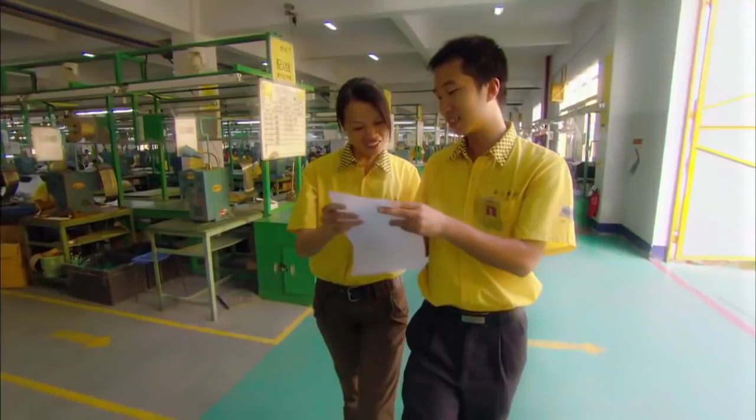But imagine living and working at one of the biggest factories in the world, a workplace the size of Monaco. For these 17,000 employees, it's reality. They come from all over China, seeking a brighter future at this factory called Yupa. Workers craft coffee makers, irons, and electric grills in staggering quantities every single day.

But Yupa is more than a steady paycheck. It's home. People get married here. They send their kids to school here. But the work never stops.

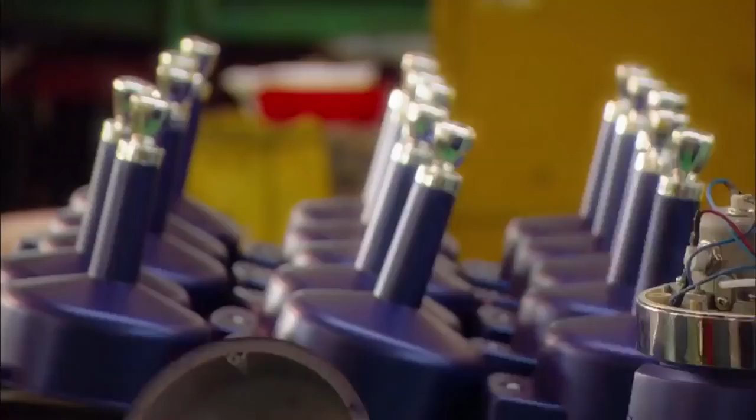Yupa's managers are on a mission to produce new products for every corner of the globe that could forever change the way we think of made in China. Step behind the closed doors of modern China into a factory the size of a city.

Welcome to the place that calls itself Factory of the World. By the time you finish watching this program, Yupa's 17,000 Chinese workers will produce nearly 20,000 electrical appliances.

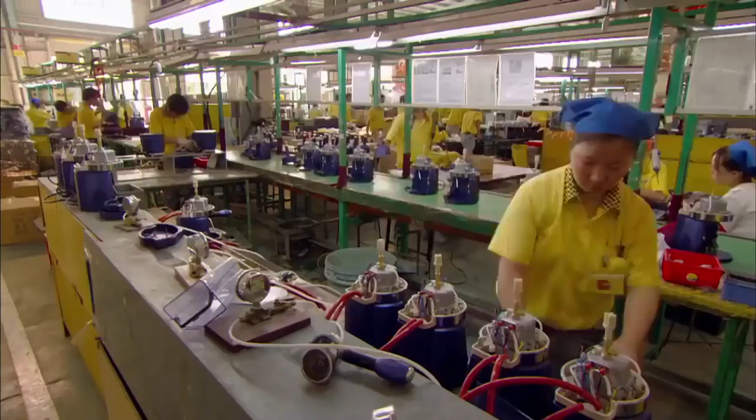Every day they churn out 60,000 irons. Every month, Yupa makes 36,000 coffee makers. That's 2 new machines for every Starbucks on the planet.

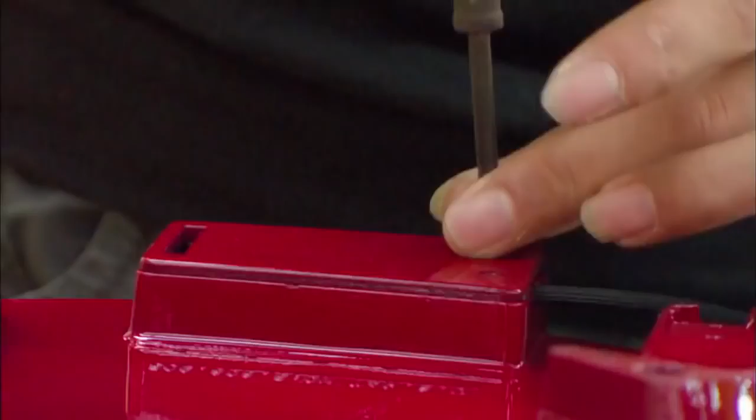And every year, these laborers produce a staggering 18 million electric grills. Stacked side by side, they'd span the Atlantic from New York to London. Chances are you own something built right here.

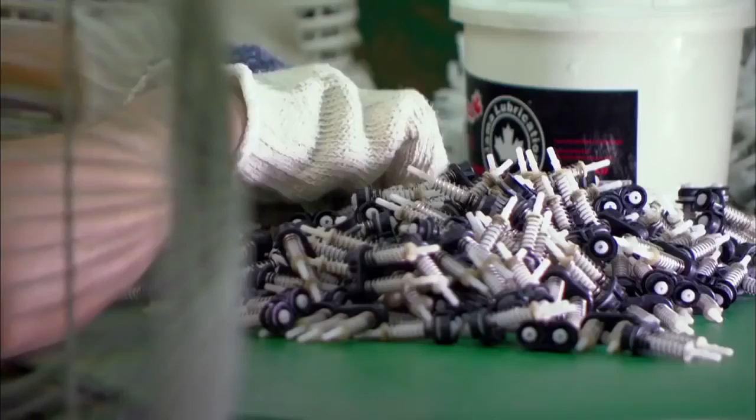Factories like these don't exist in North America or Europe, but they're not uncommon in China, where labor is cheap. Yupa runs on human sweat alone, no need for robots. To ensure non-stop production, workers need a steady stream of parts. Someone has to make sure those parts get to the right place in time.

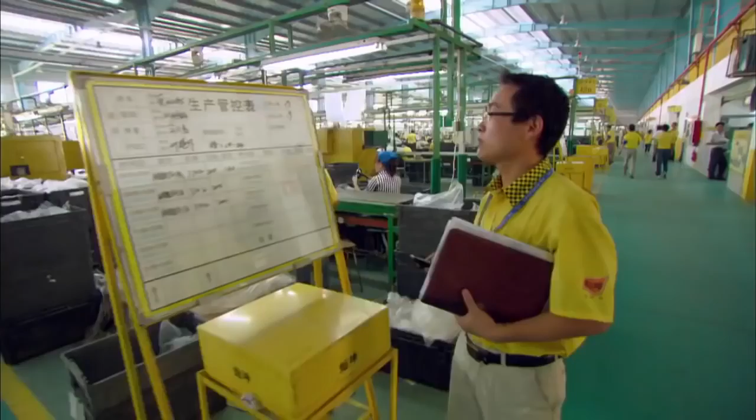I'm in charge of production control. Production control is the brain of the factory. Its main function is to coordinate each department.

If any of Yupa's factories run out of parts, Mr. He's job is on the line.

The production line cannot wait. We have to guarantee that our production is smooth. Running out of materials would affect our efficiency, affect our productivity, and affect our revenue. So I have to fix this in the shortest time possible.

Today, a problem at the iron factory needs smoothing out.

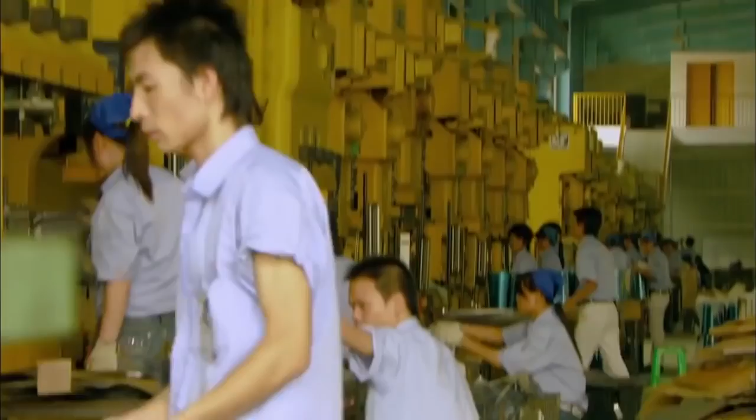Traditional plants use outside suppliers for their components, not Yupa. To slash costs and stay competitive, Yupa builds its own parts on site. So Mr. He's supplier is only a bike ride away.

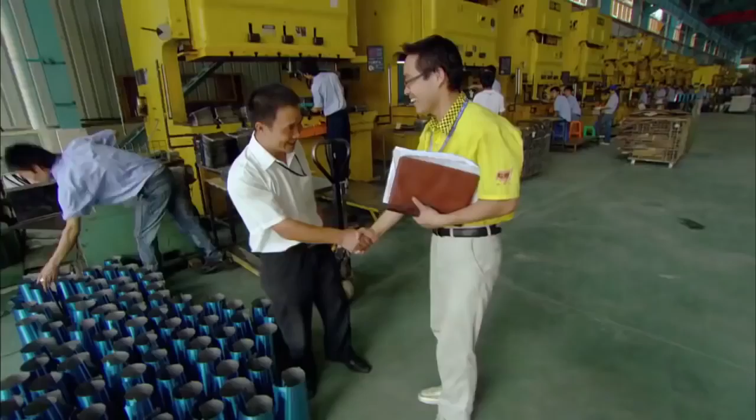When he gets another urgent call.

Now the grill factory is low on a crucial component.

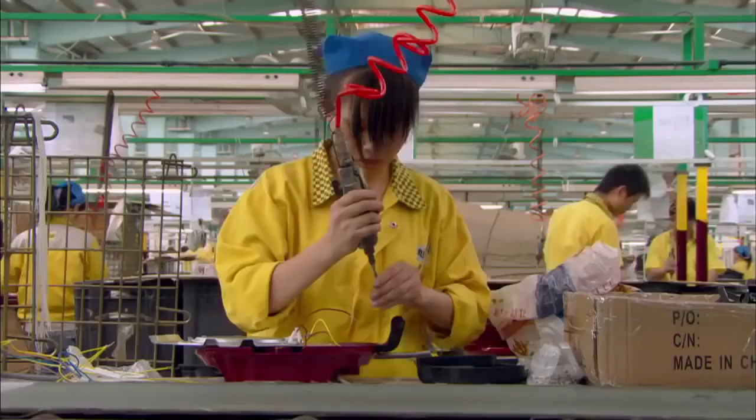Grills are the company's most profitable products. Yupa started producing one line of grills in 1994. Now, 60 assembly lines churn out 800 different models.

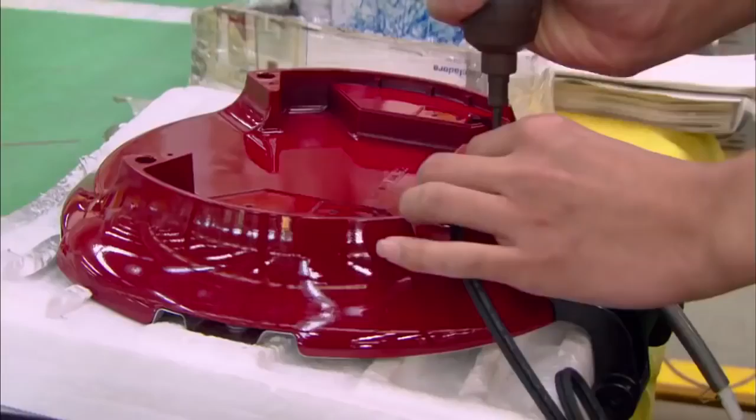Workers make one grill every 12 seconds. That's 50,000 grills per day, or 1.5 million per month, enough grills for every person in Dallas. Grills bring in $350 million a year, but Yupa wants more.

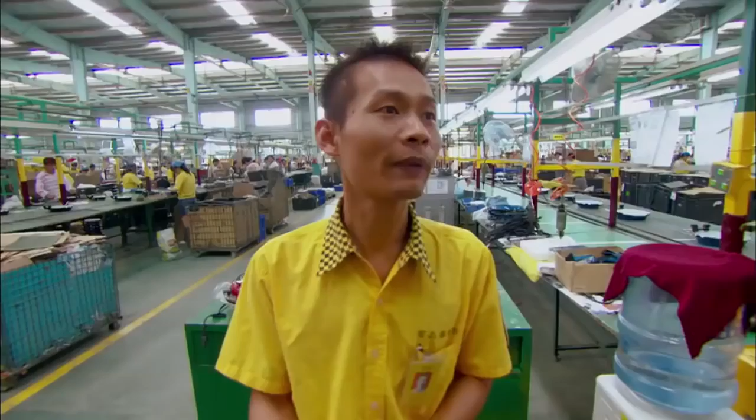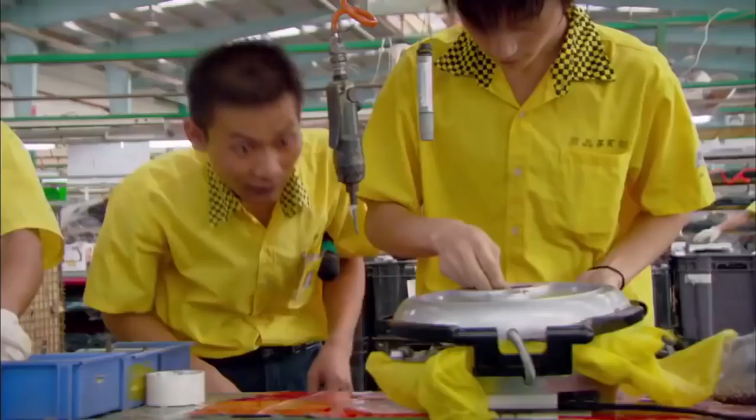By next year, managers expect workers to crank out $500 million worth of grills. Yupa's profits have to rise to outmuscle the competition.

Mr. Ye supervises 850 workers on 30 lines. We have to coordinate all these workers and pull all their thoughts into one. It takes teamwork to accomplish our goals, to get the results we want.

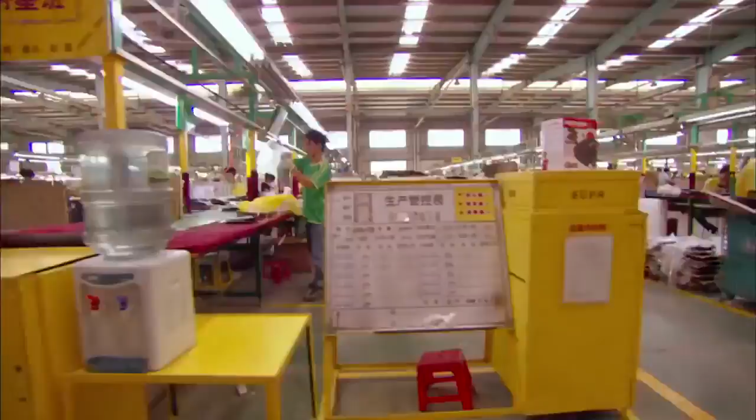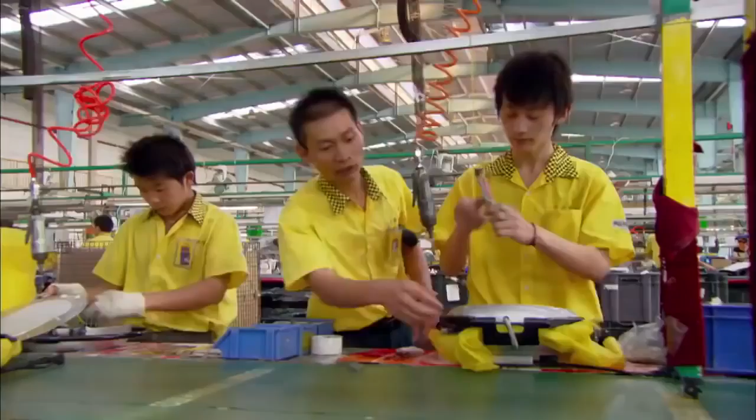Mr. Ye is obsessed with quality control. His aim? Boost output without compromising quality.

In a factory this big, with a production run so massive, even the hyper-efficient Mr. Ye hits a roadblock.

This holder piece holds the grill plate. What we're seeing now is the assembly of this piece. The problem is the size. It's the wrong size.

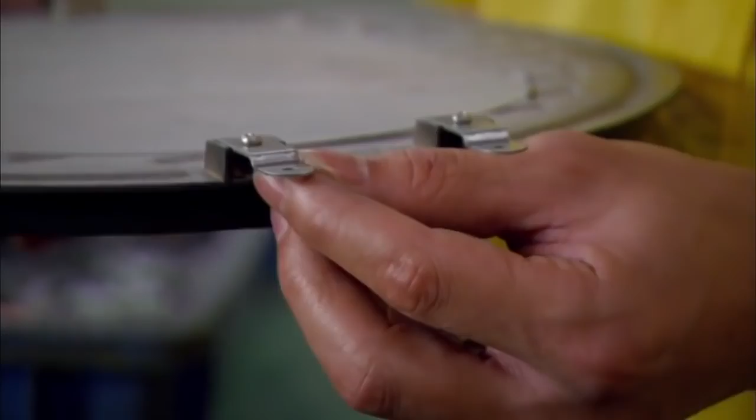They've run out of part number 2627. It attaches the core heating element to the frame. Without this simple component, assembly lines will shut down, unless Mr. Ha finds a fresh supply, and soon.

If we don't get them the parts, 6 production lines will have to stop.

When every part is on hand, grills assemble like a simple puzzle. Wires are linked to the heating element, and the element is fixed to the plate.

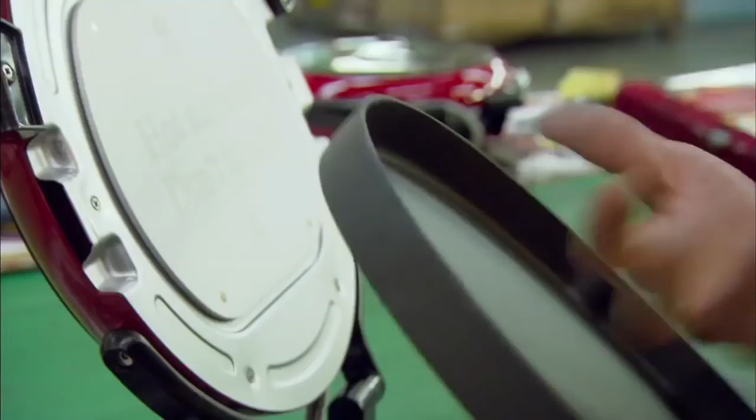When it's not locked down properly, it will fall off. If it falls off, it will burn the hands of our customers and consumers. This job is very important.

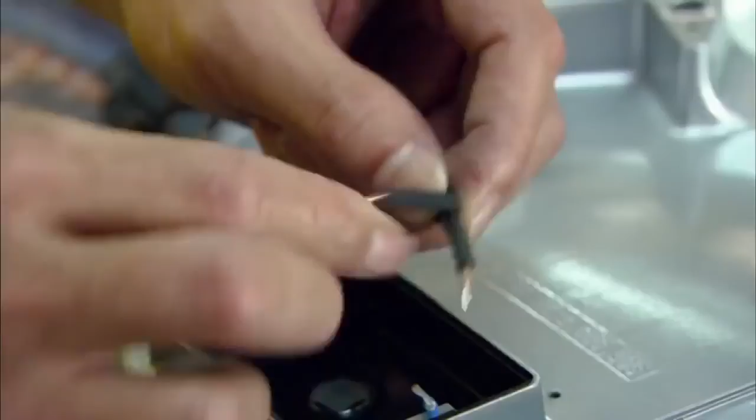Then it's time to connect the power cord. The brown wire is live and the blue wire is neutral. The one with the writing on it matches the brown wire. Connect them and that makes the wire live.

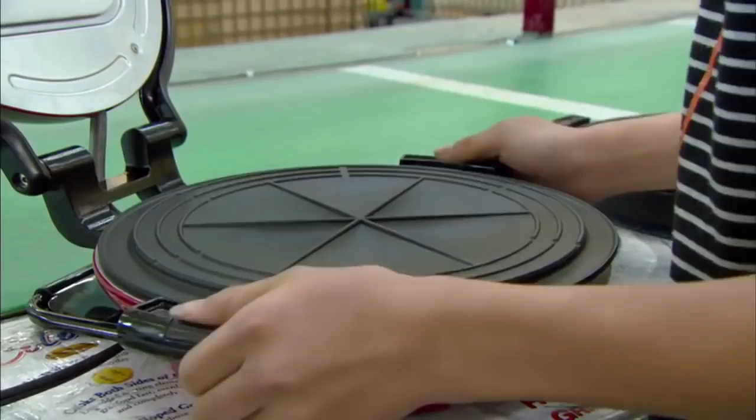Each grill is inspected for flaws in construction or appearance. Finally, every grill is tested to make sure everything is in working order.

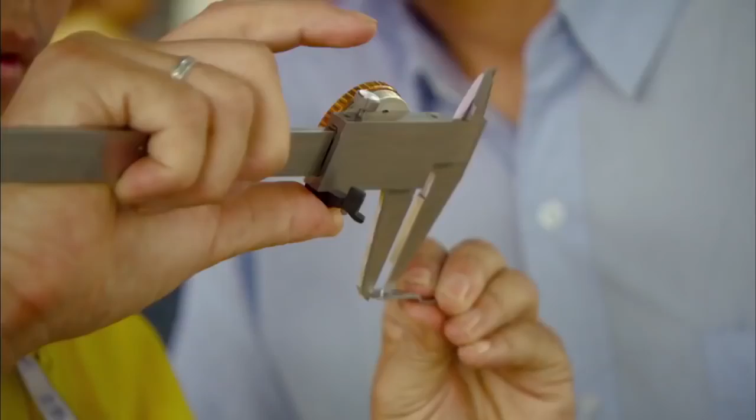On a typical day, Mr. Ye's team must make 700 of Yupa's 50,000 grills. Missing parts cause delays, cost Yupa a fortune, and force workers into overtime to meet their quota. Finding the missing parts falls to Mr. Ha, and the pressure is on.

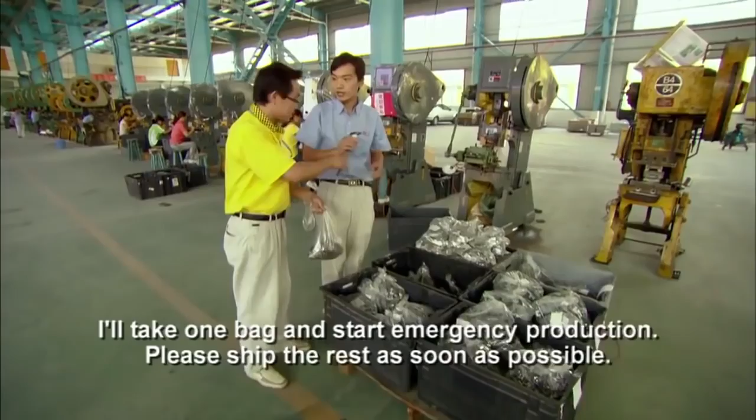Mr. Ha finally arrives, and he has good news.

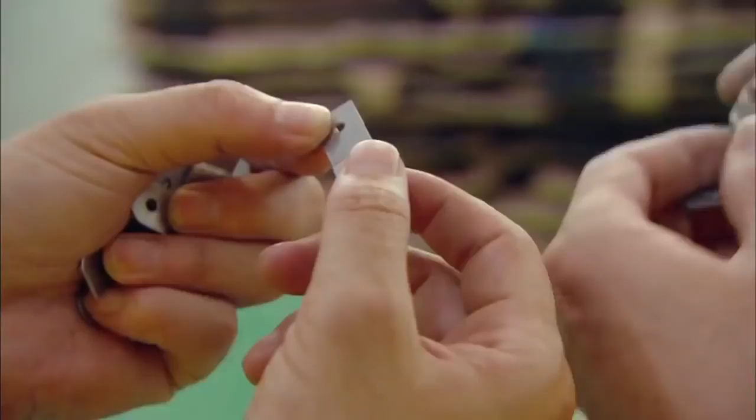Mr. Ha's day has ended on a high note. He heads home to a company-subsidized apartment only minutes away.

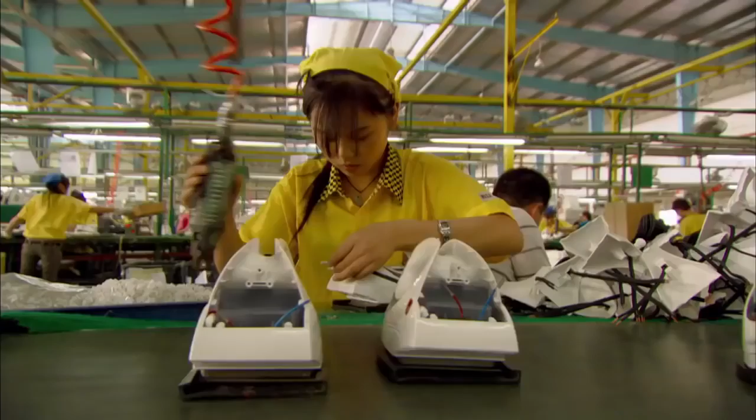It's a place tourists never see. The new face of modern China, competitive, hungry for profits, and ready to take on the world. Located near the city of Xiamen, the Yupa complex sprawls for 1.8 square kilometers, almost the size of Monaco.

We have about over 20 buildings here. The largest building is equal to about 4 football fields. You can have 60 to 70 assembly lines. Each assembly line can have 25 to 35 workers in the line.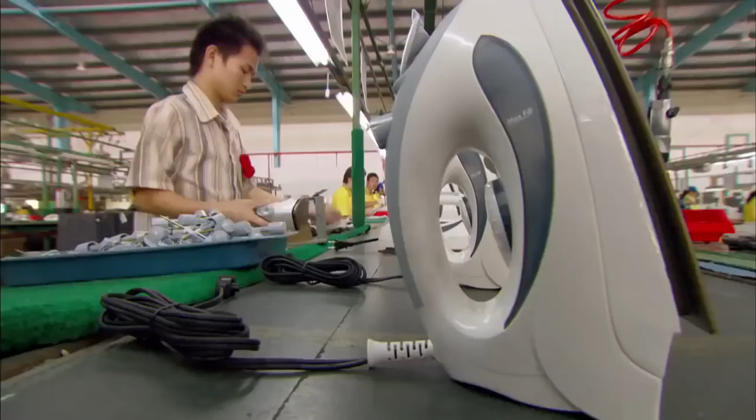25 years ago, there were no factories here, only farms. In the 1980s, the Chinese government decided capitalism wasn't so bad after all. The communist regime established so-called special economic zones, designated places for free markets and foreign investments. Eupa, a Taiwanese company, moved here in 1988. In a few short years, it became the largest manufacturer of irons, electric grills, and espresso makers in the world.

Eupa is a city unto itself, with restaurants and convenience stores, soccer fields and basketball courts, and living quarters for everyone from students to families. Success made it big, and size keeps it successful.

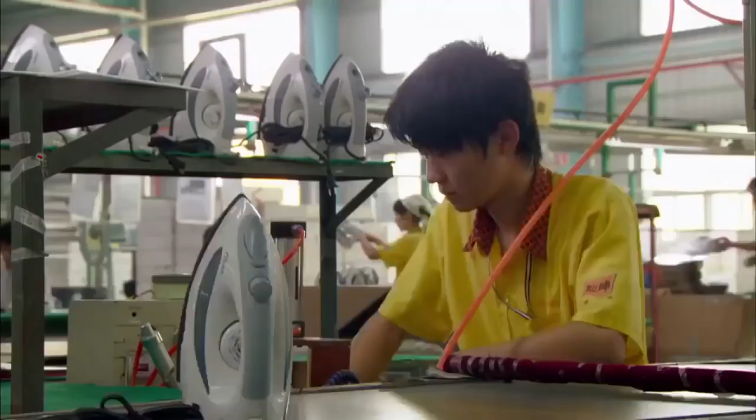Mass production runs push down costs. Almost all parts are made on-site, keeping supply costs low and parts within easy reach. Because we are in this location pretty much isolated, we don't have satellite suppliers surrounding us to build parts for us. So we had to do it in-house, and we had to do it on a large scale.

Eupa's main advantage is a cheap and endless labor force, ready to work for a fraction of a Western wage. 16-year-old Mao Fen Guo left her family and came here in 2008.

But Guo isn't just looking for work. She's here to escape poverty and make her mother proud. In China, many parents prefer sons to daughters.

My mother has only 2 daughters. She's always upset about that. And in order to not let her down, I must work harder and harder.

Guo is a worker in training. With about 1,000 other students, she attends Eupa's on-site trade school. To get here, she had to pass entry exams and pay Eupa tuition. Now she's enrolled in 3 years of study and hands-on training at the factory. If she does well, Guo hopes for a job at Eupa.

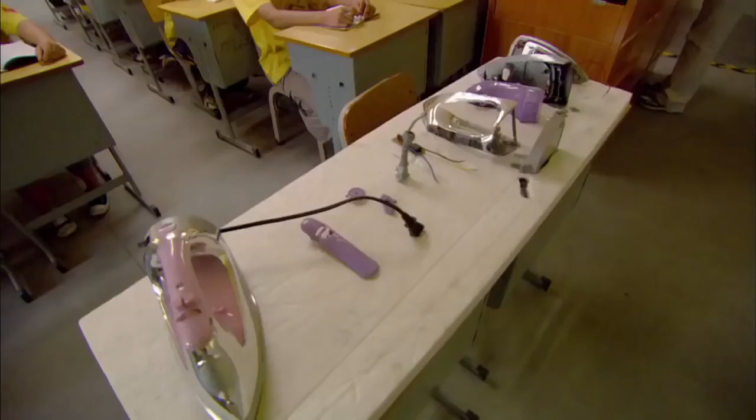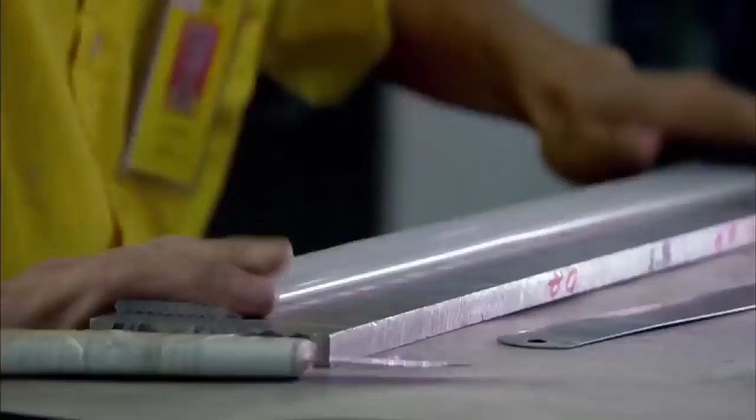Today, she and her classmates are learning everything they ever wanted to know and more about irons. To get a job, Guo must learn the ins and outs of every product line.

We're changing constantly. Last time, we were making grills. Then we changed to coffee makers, and now electric irons. Workers on 27 production lines pump out an iron every 15 seconds, and as many as 60,000 irons a day.

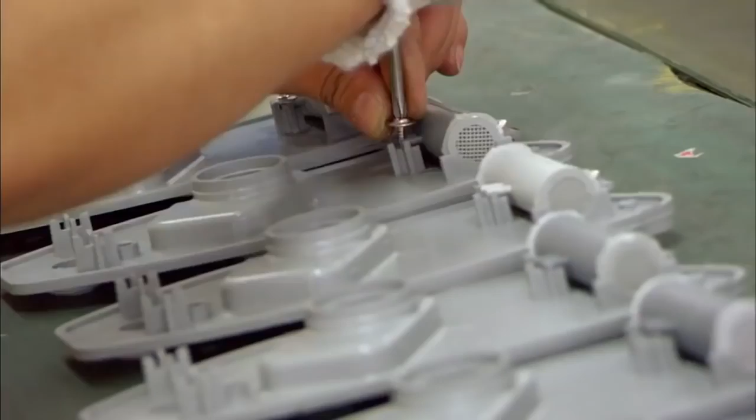Production includes at least 10 separate brands for dozens of companies. With over 30 steps to assembly, iron making is intricate work. And there's no room for error.

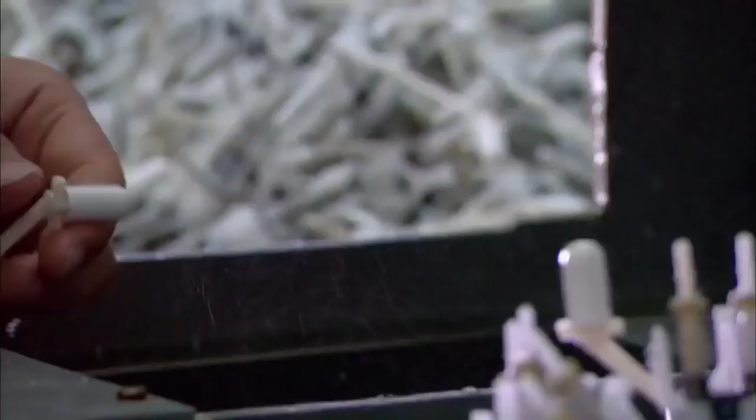Assembly starts with a water spray unit, made up of springs, rubber, and washers. With training and practice, it snaps into the spout in seconds. If it's not closed tight, it will leak or blow. Then it won't work properly.

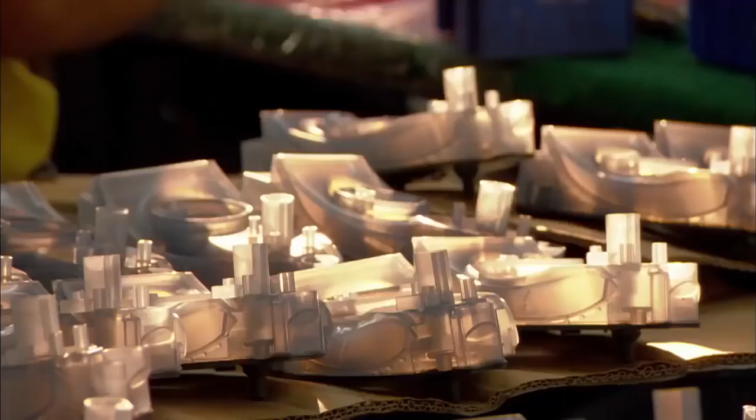Now the sprayer and spout are joined to the handle. The two parts of the water reservoir are placed in a heating machine that melts the space between them and makes the reservoir watertight.

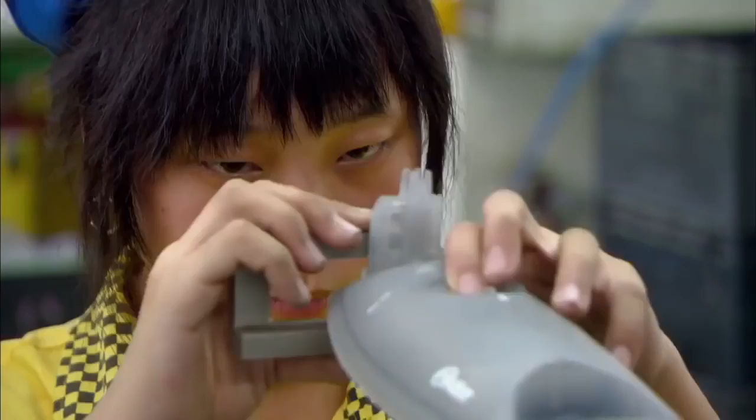Welding is an important part of production. However, it will be easy as long as we follow our operational guidelines. Next, the thermostat is attached to the base.

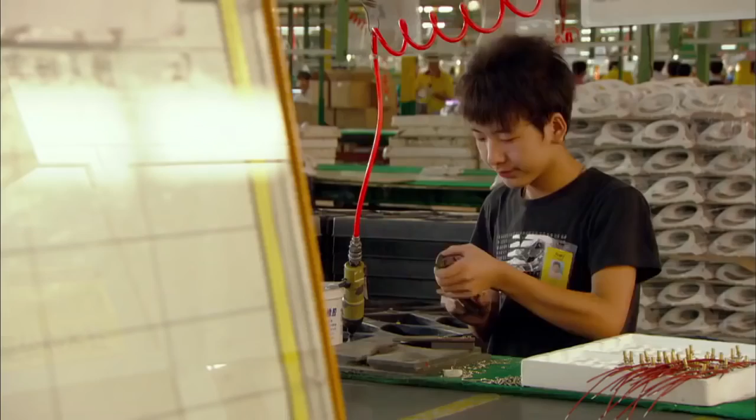You need to make sure you're using the correct format before you insert the base. Using a wrong base can lead to fire. Wiring is also important. Where there is a wiring mistake, there's hidden trouble.

A plastic buffer is placed between the heating element and the handle to keep the handle and the user's hand from getting too hot. After that, the plug is welded to the back of the iron.

We're connecting the wire for the power supply. I can do about 4 to 5 pieces every minute and 300 pieces an hour.

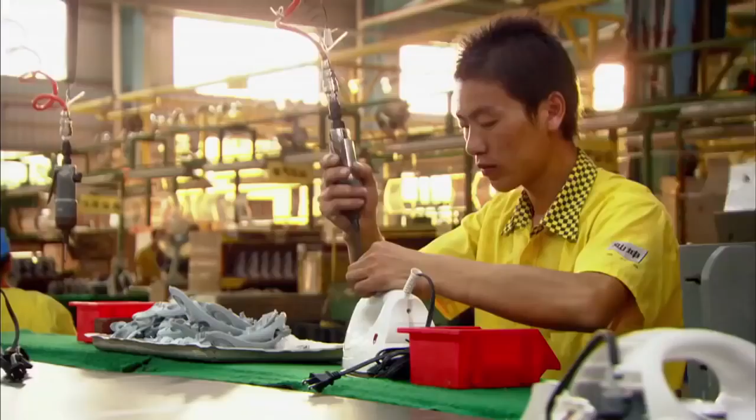Once the spray and steam buttons are attached, it's testing time. First, the steam and squirting functions. Second, the iron's electrical system.

Faulty units are either repaired or removed. Finally, irons that pass inspection are packed up and shipped away. The team won't cut corners or settle for second best.

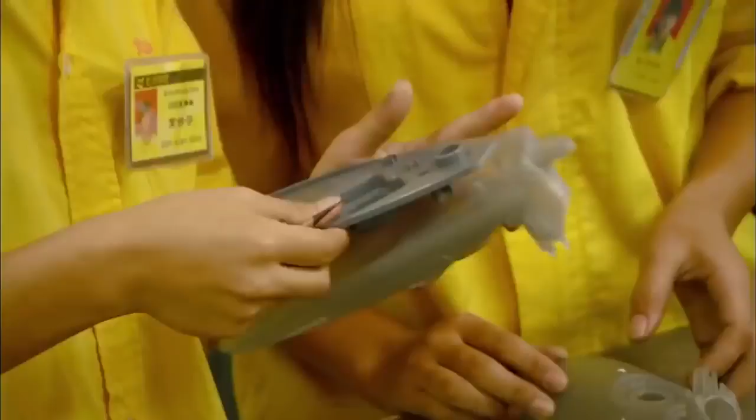Today, Guo and her classmates will put classroom theory into practice and work the iron line. For a teenager from a small town, living and working in a giant factory can be overwhelming.

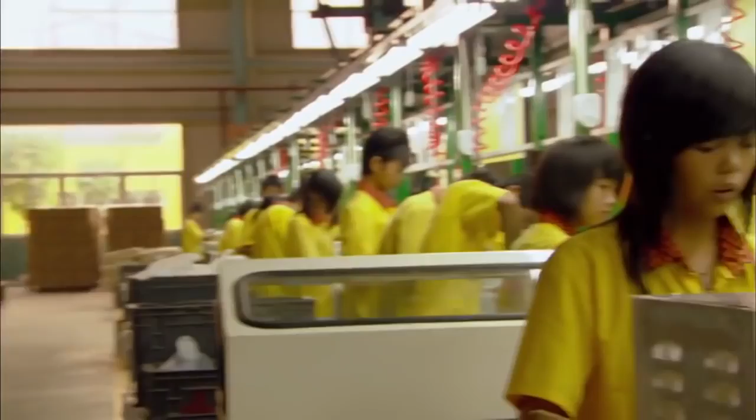My life is not as hard as it was before. I'm getting used to this place now.

Work on the iron line goes better than expected. For Guo, juggling work and school isn't that difficult.

The hard part is leaving family and living far from home.

I guess it's learning how to be independent. When I first arrived here, I didn't know anyone else, and we all have to live together. It was really tough in the beginning.

Like China, Guo is adapting to a new world of high technology and tough international competition. And like China itself, she's determined to succeed.

I don't see myself working on the production line forever, doing the same job. Maybe I'm a bit arrogant or too confident about myself, but I want a better future.

For some people, a better future keeps them married to their job. Workers at Yupa are married to the company.

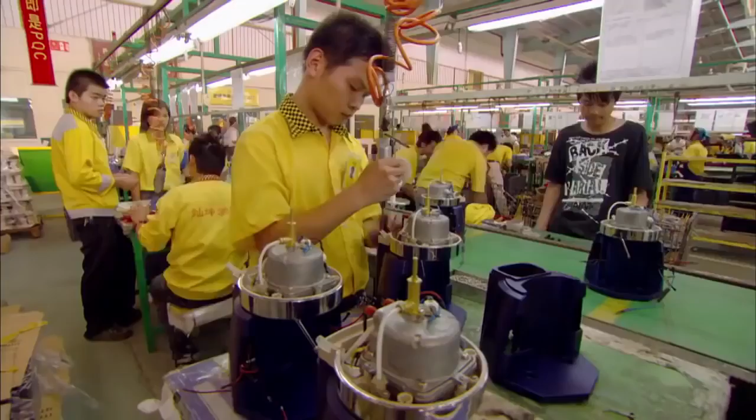In the next 24 hours, it will produce 1,200 conventional coffee makers. Over the next 30 days, these assembly lines will deliver 210,000 cappuccino espresso machines. In the space of 1 year, nearly 2.5 million coffee makers will pour out of Yupa and into the kitchens of the world.

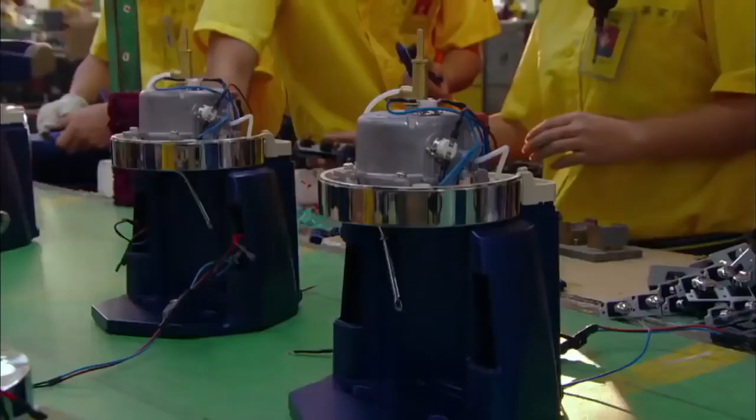At the center of all this is young Lee. We already have 200 or 300 styles, and we develop and add over 40 new styles every year.

Lee's mandate is crucial and broad: tackle any problem that could slow down non-stop production.

We have to make every effort to find these problems and to solve them. We have to make sure that every process is working perfectly. Manufacturing shouldn't be delayed because of these problems.

Today, he's got a brand new kind of problem. One of EUPA's big clients has designed a new coffee maker. It's up to Lee to build a working prototype to entice the client into going ahead with mass production.

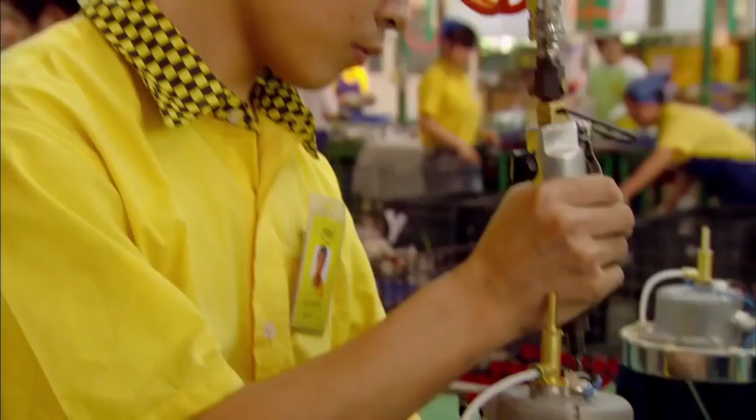Hundreds of EUPA jobs and millions of dollars in potential business are now in Lee's hands. Making prototypes is a large portion of my job and is vitally important to the development of the company.

Lee starts by assembling the heating system for the water and steam. Then he carefully places it into the main body. Just when Lee's ready to assemble it all, there are parts missing.

The supplier is just a walk away, a long walk, but Lee doesn't mind the distance. Someone special is waiting for him at the supply depot.

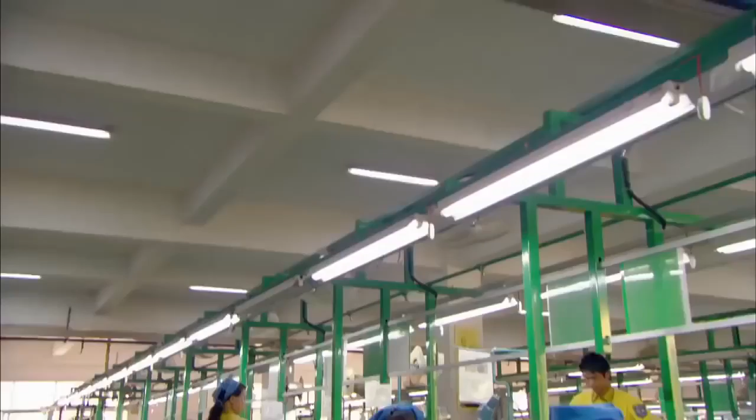The person helping him today is his girlfriend. These perks make EUPA more than a place of work.

With a workforce of 17,000, many of them married with kids, this factory city turns office space into personal space.

Sometimes we work together. For example, if we need the help from the technician to solve production problems, then we meet each other afterwards.

Li Yang Lee works in the parts supply department. She first came to EUPA in 2004.

We fell in love at first sight. I always think it must be God who makes her work here and wait for me. Even now, I still think the same.

EUPA management encourages these intimate connections. They believe couples that work together are more loyal to the company.

By working in the same company, we can go to work together and take care of each other. We can see each other more often. What's more, we can be with each other when we have a problem.

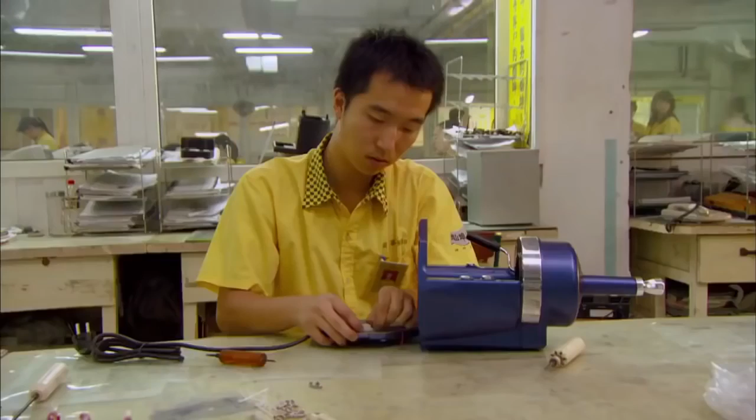With the missing parts in hand, Lee is ready for wiring. Making it all fit into the chamber isn't easy.

I will have to organize all the electrical wires properly to make sure the coffee maker operates safely.

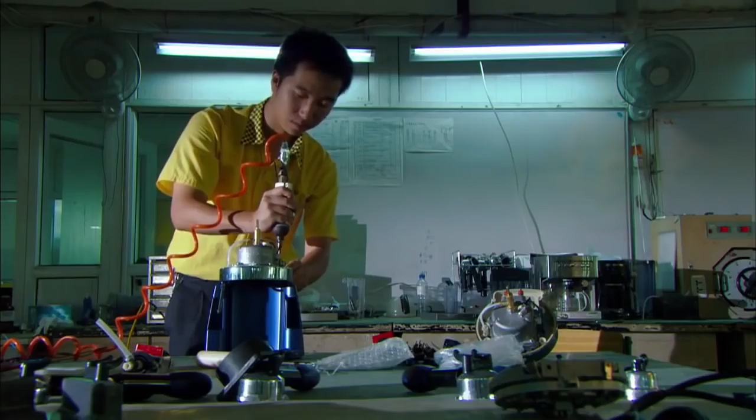But the real test will come after shipping. If the client approves of Lee's model, EUPA could get a massive order. If it doesn't, hundreds of jobs are on the line.

If I make the prototype in a sloppy way, our customers will lose confidence in the quality of our products. It will be a great loss to our company.

Weeks later, Lee's model is approved for mass production, and right away he sets out to create a brand new production line.

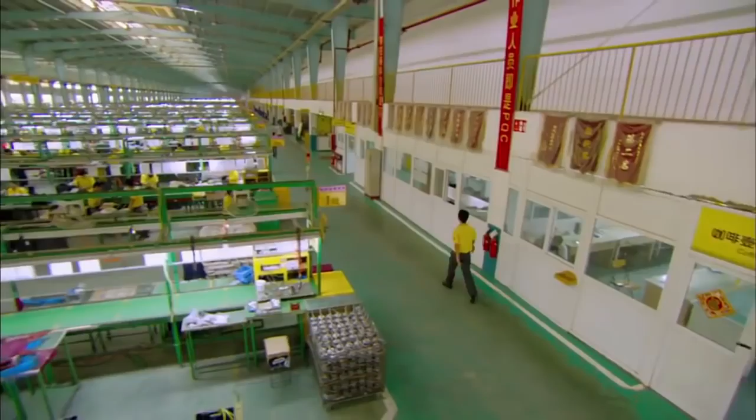It takes a week to prepare the assembly line and train the workers to make the new coffee machine. Making a coffee maker is not an easy job at all - it requires professional knowledge and a profound understanding of coffee culture.

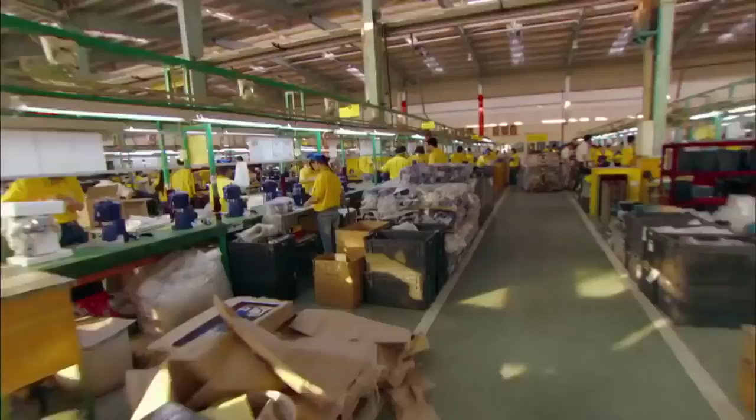When the prep is done, Factory City springs into action and works with astonishing speed. Lee's prototype took half a day to make. Now line workers churn out 700 machines a day.

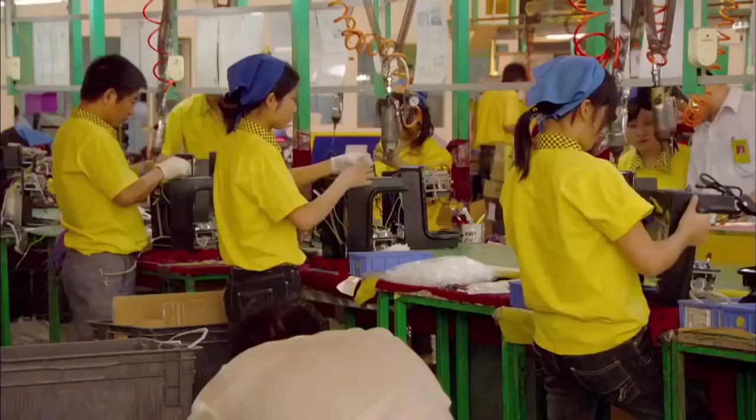Lee's shift is done, and when work ends at Factory City, romance begins. When we're done work, we normally go shopping together or take a walk. It gives us a sense of happiness.

The couple plan to get married at a mass wedding, paid for and organized by the company. All at once, dozens of Yupa workers will tie the knot, while thousands of co-workers look on.

If we take part in the group wedding, with the best wishes of all of our co-workers here, we know we will be getting married in the factory of the world, one dream, and that would be unforgettable.

A mass wedding is the couple's way of showing their love for each other and their passion for Yupa. Chef Xingming Li has a passion of his own, feeding the 17,000 workers that power the factory of the world.

At Factory City, the day has barely begun, but Chef Xingming Li already faces his first daily deadline.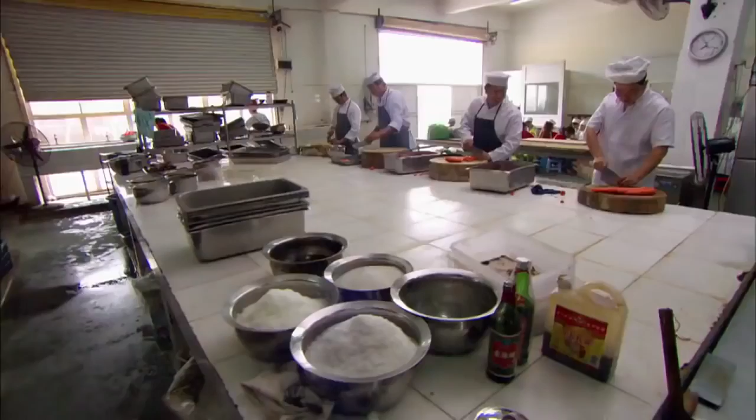Everything is washed, sliced, and diced. Yupa churns out millions of kitchen appliances a year, but there are no food processors in Li's kitchen. Nothing is automated. Everything is done by hand.

By 9 a.m., Li's staff is already racing against the clock. We'll have to finish everything before 11 o'clock because Yupa staff restaurants all open at 11:30. We have to be there in advance.

In 2 hours, 3,000 workers will stop by for lunch. Li expects just as many for dinner. This means his staff of 50 must serve 6,000 meals by sunset.

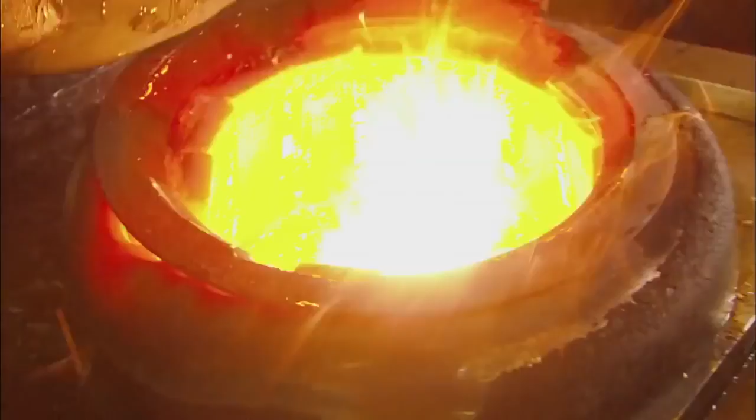We can make different cuisines. Our chefs are all the best of their hometown. They cook up dishes from Fujian, Sichuan, and Henan regions, and they'll soon add halal fare for Muslim clients.

I believe everything that we cook should taste like what your mom cooks for you at home. Li's obsession with food comes from growing up hungry.

My family was very poor. Although my dad was working very hard to earn money, we still didn't have much food to eat. Now food is never in short supply, and all of Li's clients return to work with their bellies full.

Li's passion for food has made him a perfectionist. He hunts the market for produce that's perfectly ripe and reasonably priced.

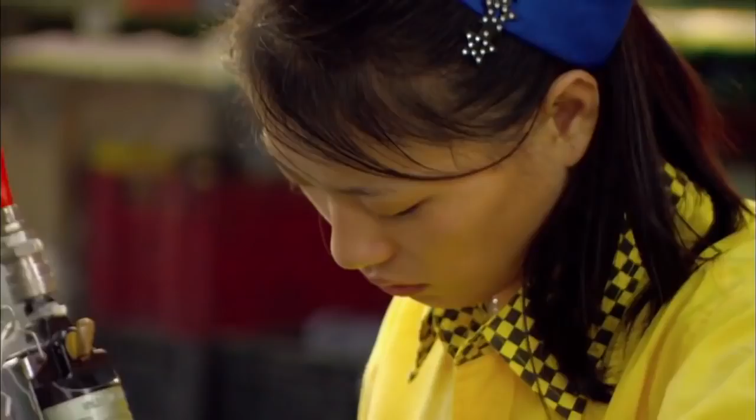Yupa's workers come from every corner of China. Most are in their 20s and 30s. They work on average 40 hours a week and make between $90 and $320 US a month.

While wages are even higher in big cities like Shanghai, many Yupa workers make double what they did back home, if they had any work there at all.

As with any mass organization, thousands of employees create endless demands. It's Mr. Fu's job to address all of them. He does everything he can to keep everyone motivated and committed to staying at the factory of the world.

Fu visits staff living quarters as part of his regular rounds.

We're now going to the workers' dormitory. I routinely go there to check if anything can be improved. If there is, I will talk to the superintendent.

Fu is part landlord and part tenants' rights advocate. Today, he's ensuring Yupa rooms are ready for a group of new workers.

Average rent is only $6 per month, but the type of accommodation depends on a worker's rank and the amount of money they are willing to part with. Fu is paying a visit to Mao Fen Guao, who has a noise complaint.

This is not easy. And while there may be harmony inside Yupa's walls, outside, competition is cutthroat. In a global market, innovation is key. Yupa's employees must endure tough changes to survive.

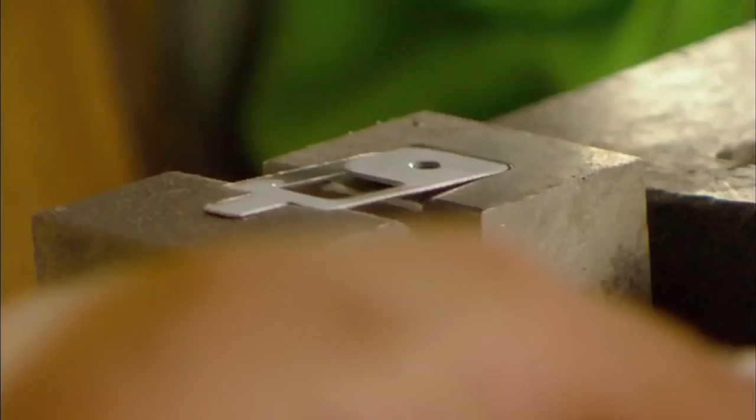In the global marketplace, there's no room for second best. To survive, companies need a competitive edge. Like most China-based companies, Yupa has relied on low labor costs, making products designed by others.

But it wants to move up the production food chain. Yupa's leaders want to design products of their own. They have little choice. To thrive and survive, Yupa must develop a new generation of products.

The factory's very existence depends on it. Thousands of jobs hang in the balance.

No work means not being able to live. This is a fundamental requirement. It's how humans survive. You have to earn money to make a living, and to earn money, you have to work.

Ji-Rong Pan knows how high the stakes are. He is Yupa's Vice President of Product Innovation.

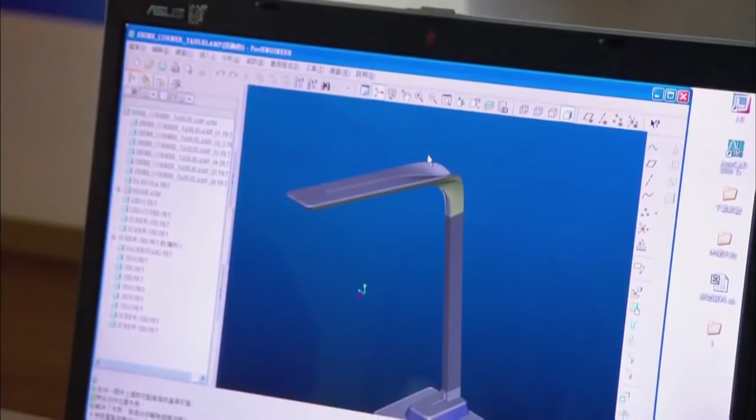I think innovation is the competitive edge of our company, because our company is in the field of home appliances, and the whole home appliance industry is a lifestyle industry.

Mr. Pan sent his staff overseas to study the lifestyle products of the future. They returned with a simple message. The future is green.

We studied the consumers of North America and Europe and their thoughts on this new energy of the future. So we know that their love of the earth is actually very strong.

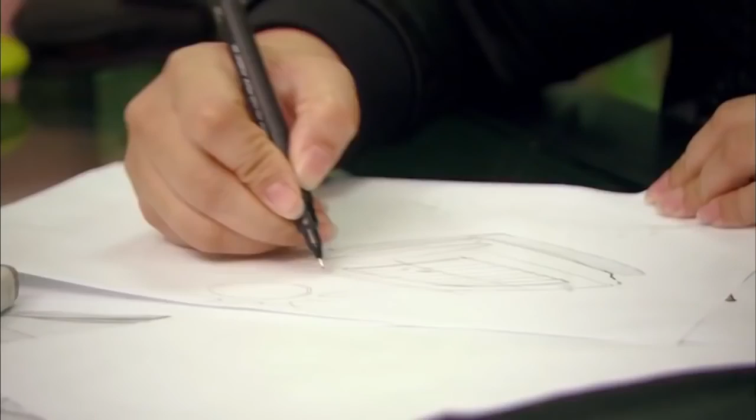Pan and his designers make a bold decision. The first appliance in Yupa's new product line will be powered by the sun. It's a solar lamp.

We want to bring this clean solar energy concept into people's homes.

Going solar may sound easy, but solar panels are expensive, and they're meant to work outside, not in the dim corners of people's homes.

A 3D image of Yupa's appliance of the future starts to emerge. Now the team must turn a digital design into reality.

This factory is a very important part of our development process. It helps turn a product concept into a finished prototype.

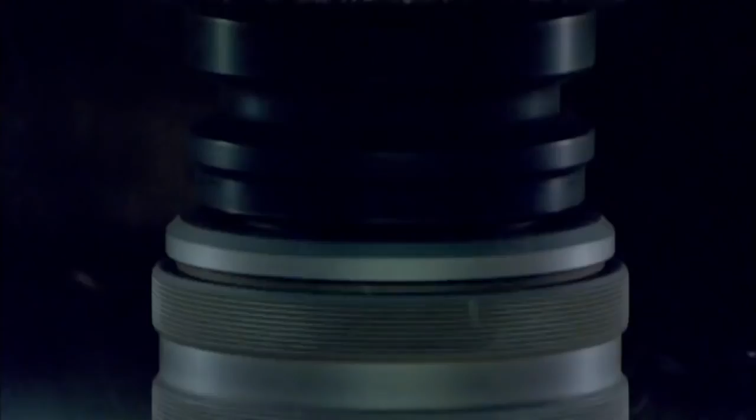Using the design specs, a computerized milling machine cuts a foam cast. And the cast is converted into a hard plastic prototype. If things go according to plan, the model will be used to produce millions of identical copies.

It allows us to test the product to see if this fulfills our requirements while bringing value to the customers.

Now engineers perfect the solar power system. The system must collect and store solar energy. Every aspect of design must maximize energy efficiency.

We've spent a lot of time studying this. What kind of technology, what kind of material, what kind of parts can help us improve our energy efficiency?

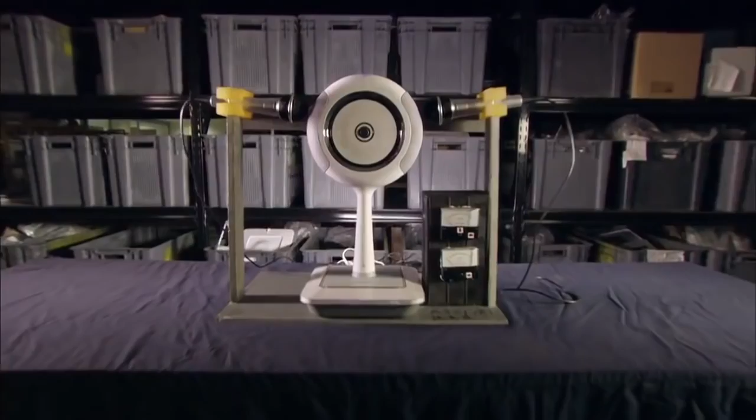Finally, Yupa's product of the future is revealed. The solar CD player is simple and elegant. The player will charge indoors when left near a window.

And the system is uniquely versatile. It will work with any energy-efficient appliance Yupa designs. But one question remains: will the world embrace Chinese solar products?

We want to bring what people originally thought of as an industrial thing and truly integrate it into their daily lives, to enable consumers to truly experience solar energy. This is a very magical energy concept.

If these innovative products succeed, Yupa could achieve its dream, a dream it shares with China, to be the factory of the world.

I want consumers and everyone to have faith in our products and faith in the workers. I hope everyone can enjoy the products we produce. This will make us proud.

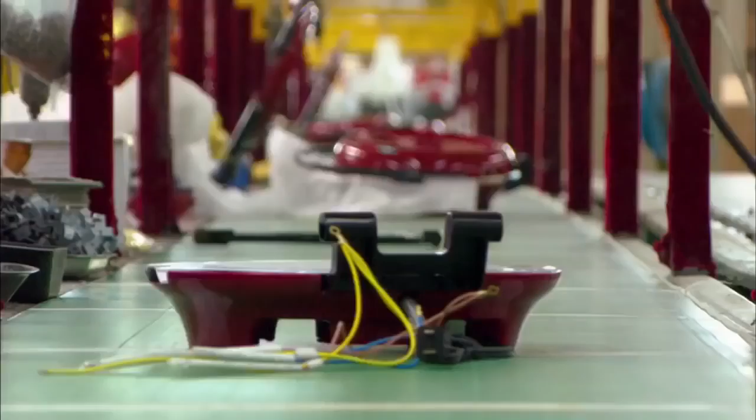With Factory City in full swing and new products in the works, more and more goods will carry the Made in China label. But for China and Factory City, growth comes at a cost.

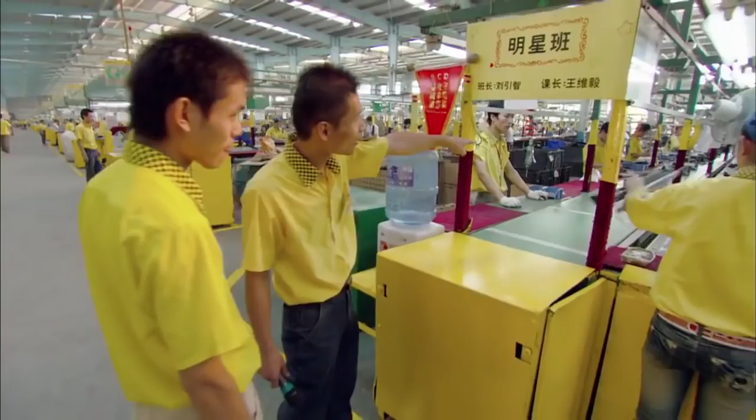Every day, the 17,000 people at Yupa endure the stress and uncertainty of a cutthroat world economy. To fight off fierce competitors and build a better life, these men and women work and live together as one at the factory of the world.